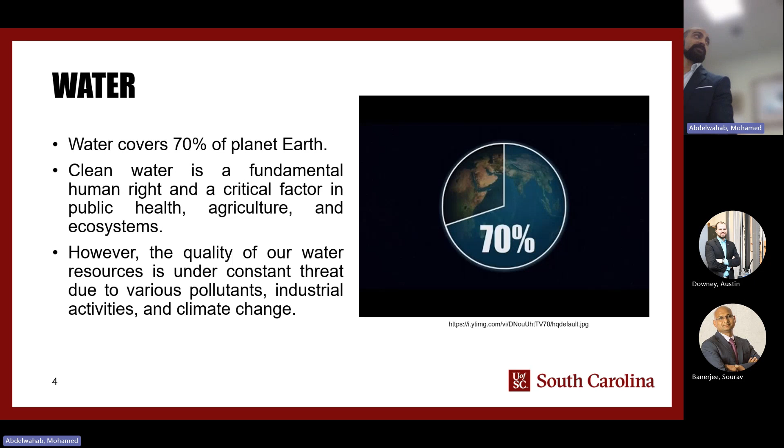Overview. We all know that water covers 70% of planet Earth, and clean water is a fundamental human right and a critical factor in public health, agriculture, and ecosystems. However, the quality of our water resources is under constant threat due to various pollutants, industrial activities, and climate change. That's why it's really important to have continuous water quality monitoring to ensure the safety and sustainability of our water resources.

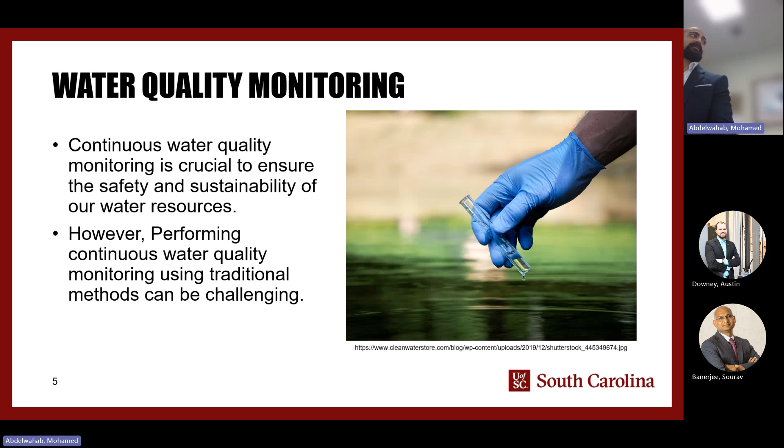However, performing continuous water quality monitoring using the traditional methods can be challenging for many reasons. For example, it's going to be labor intensive, high costs. We're going to have access to limited data, delays in data reporting, spatial variability, and incomplete monitoring. That's why it's important to have an advanced testing method. For example, it should have automated real-time data collection, multi-parameter monitoring, data processing and interpolation, and long deployment duration.

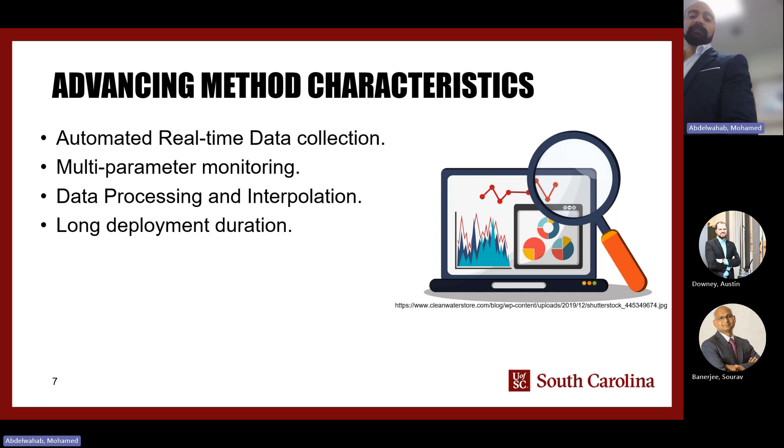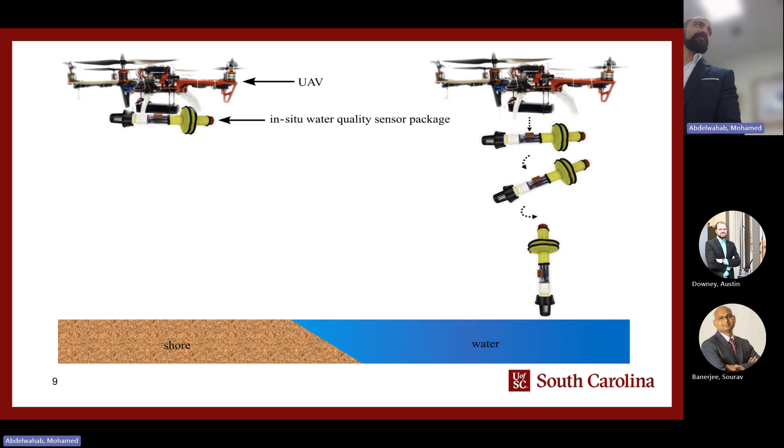The method in our study depends on a UAV designed by ARTS Lab team. This UAV is going to carry our sensor package and deploy it in the desired testing pond or the water body that we want to test. The deployment mechanism is going to be based on an electropermanent magnet, which uses electric current to create a magnetic field. And this current controls the magnetic field and can be toggled on and off.

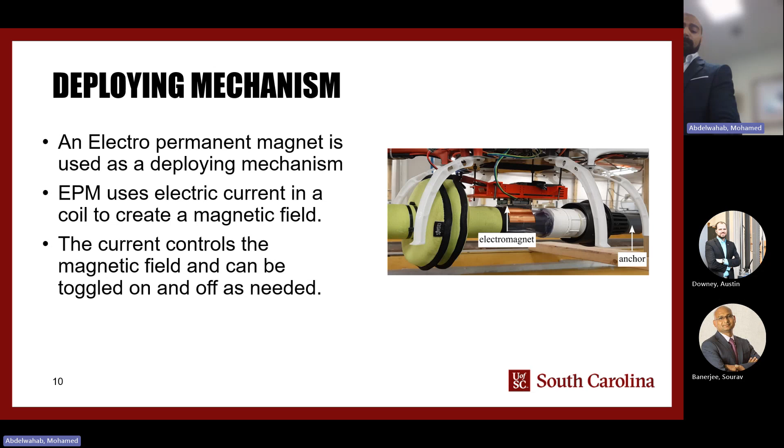After collecting our data from the sensor package, we're going to employ kriging to create a spatial representation of the water parameters on a map. And this will help us to identify the areas of concern and assess the overall water quality.

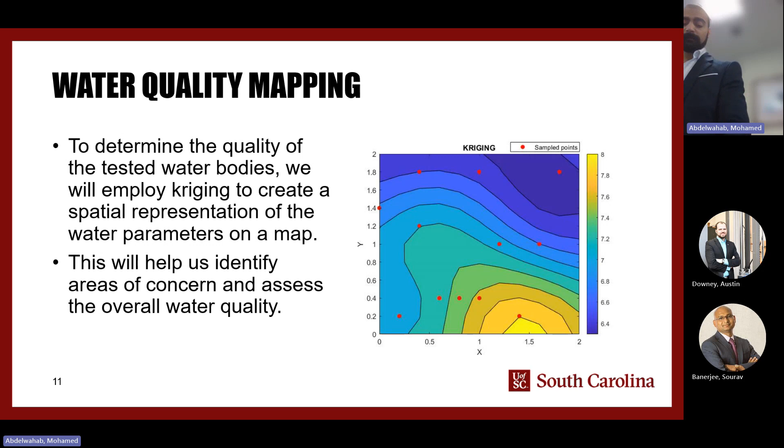Our in-situ water quality sensor package is a real-time multi-parameter monitor. It's capable of storing data on site. It has aerial deployment, it's power efficient, with long-term testing capability, floating capability, and it's fully waterproofed.

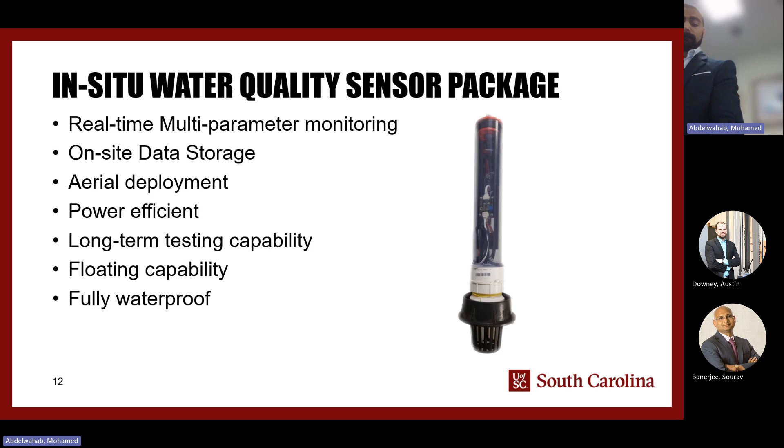Our sensor package consists of two parts, an inner part and an outer part. The inner part consists of a tray, which is holding all the electronic components inside it. And the electronic components consist of a battery, PCB, microcontroller, and sensor modules. The outer part is acting as a housing for the inner part and consists of a sealing cap, buoys, a metal grip, which is the part that is going to be attached to the UAV, and a probe protection cap.

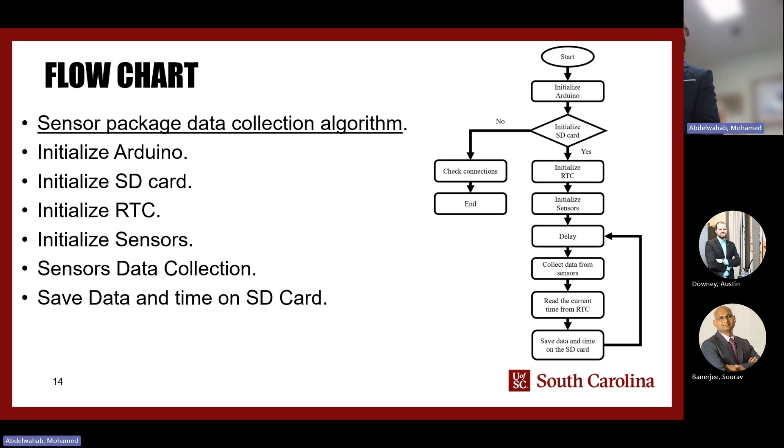The following flow chart is showing the sensor package data collection algorithm. It's going to start by initializing the Arduino, and then it's going to check for the initialization of the SD card. If no, it's going to ask for checking the connections. If yes, it's going to initialize the RTC and then initialize the sensors. After that, there's going to be a delay time, depending on the sampling time that we had adjusted. And then it's going to start collecting the data from the sensors. After that, it's going to read the current time from the RTC, and it's going to save both the data and the time on the SD card.

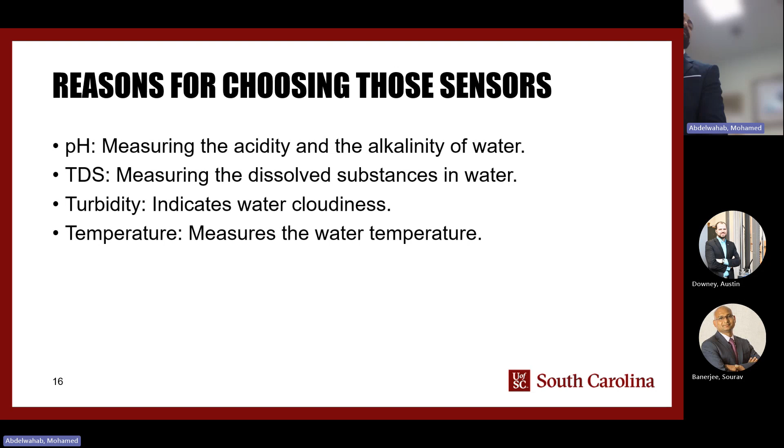Our sensor package consists of 4 main sensors: pH, TDS, which is the total dissolved solids, turbidity, and temperature. The reasons for choosing those sensors: the pH is for measuring the acidity and alkalinity of the water. TDS is measuring the dissolved substances in water, and a high level of minerals inside the water can affect the irrigation process. Turbidity indicates the water cloudiness, and this can be a sign of contamination inside the water. Temperature, of course, is for measuring the temperature of the water, and this is related to the solubility of oxygen inside the water.

System hardware. We got 4 sensor modules in our sensor package: pH sensor, TDS, turbidity, and temperature. All our sensor modules are analog sensors, except the temperature. It's a digital sensor.

All our sensor modules' operating voltage is 5 volts, and the unit range for the pH is from 0 to 14, and the TDS is from 0 to 1000 parts per million. The range for the turbidity sensor is from 0 to 100 nephelometric units. The temperature ranges from -55 to 125 Celsius.

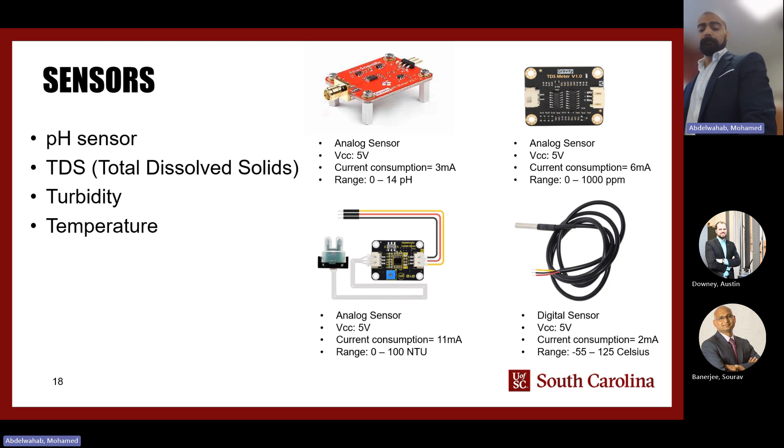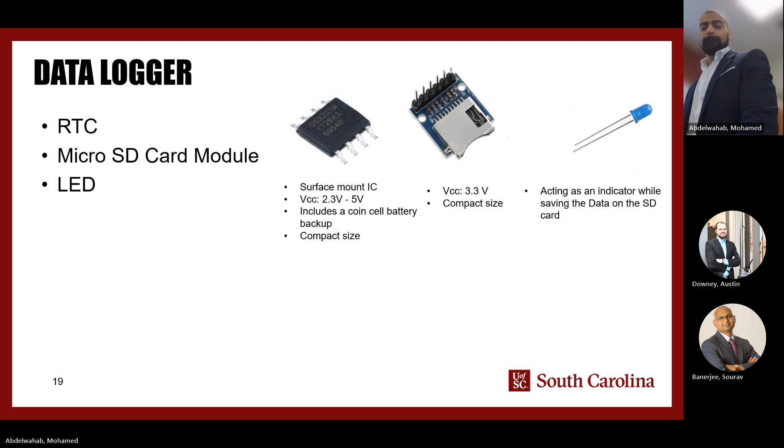The data logger consists of 3 main components: the RTC, the micro SD card, and an LED. The RTC that we have used is a surface mount IC and includes a coin cell battery backup, and it's known for its compact size. And for the SD card, the operating voltage is 3.3 volts, and it's also known for its compact size. The LED is acting as an indicator while saving the data on the SD card. The microcontroller that we use in our sensor package is an Arduino Nano. It's known for its compact size and low cost.

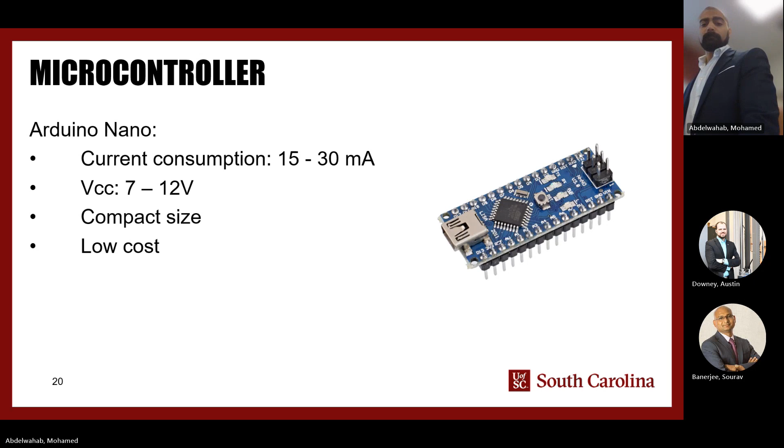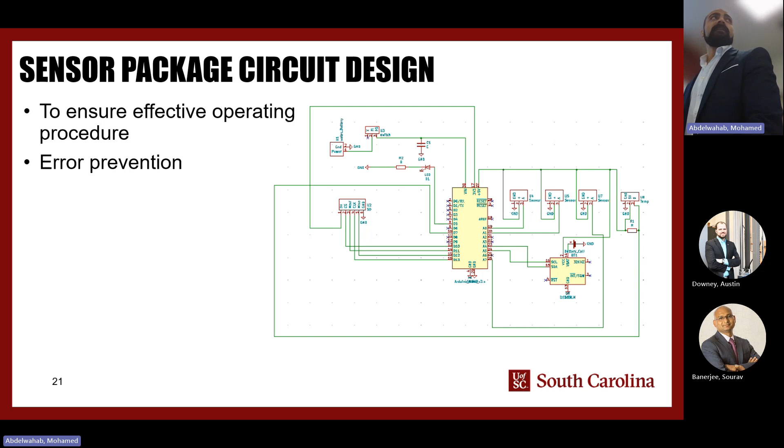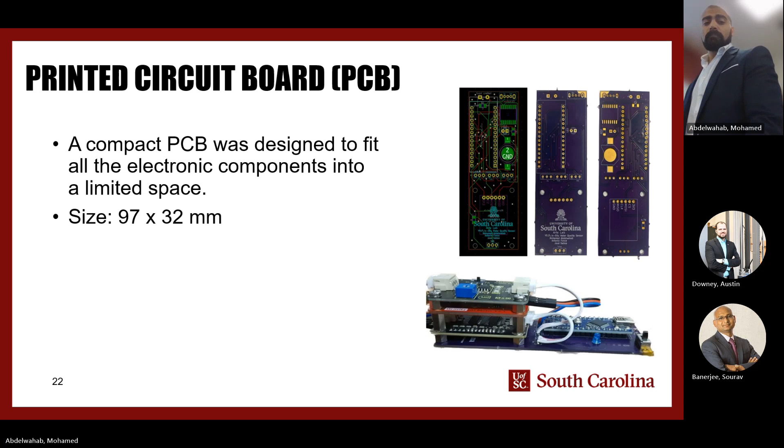Then we started designing a schematic which includes all the electronic components for our sensor package to ensure an effective operating procedure and for error prevention. After designing the schematic, we started designing a compact PCB, which is going to include all the electronic components because we have limited space. And as you can see, the size of the PCB was very small. It's 97 millimeters in length and 32 millimeters in width. The powering source of our sensor package is a rechargeable LiPo battery, 7.4 volts and 1000 milliamp hours.

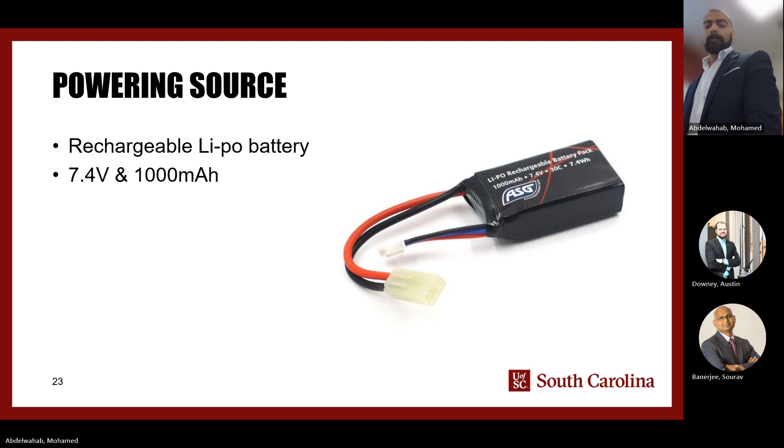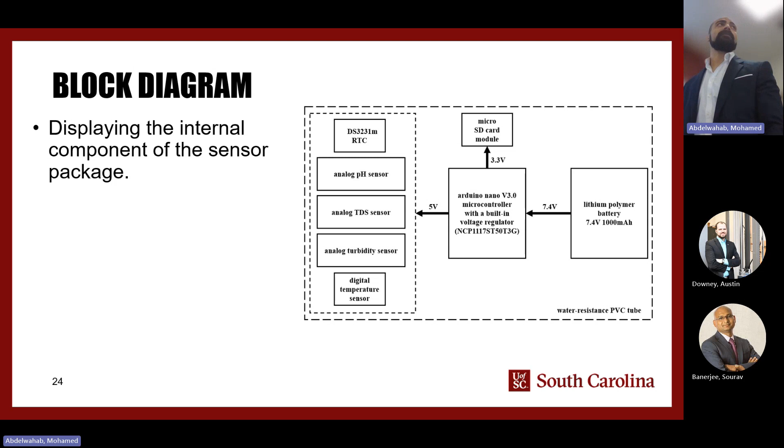The current block diagram is displaying the internal components of our sensor package. As you can see here, the LiPo battery is powering our microcontroller, and the microcontroller is powering the SD card and the RTC and the 4 sensor modules that we got.

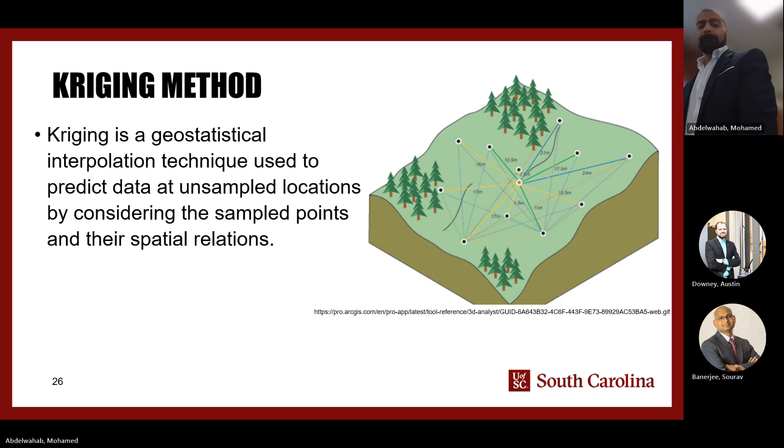Kriging. Kriging is a geostatistical interpolation technique used to predict data at the unsampled location by considering the sample points and their spatial relations. Kriging depends on a semivariogram, and the semivariogram is a spatial relation map that illustrates how data points become more similar or different as their distance from each other changes.

And it consists of 3 hyperparameters: the nugget, the range, and the sill. The nugget represents the variation of the data at very small distance. The range is the distance in which the data points are correlated, and beyond this range, the data points become uncorrelated. The sill is the total amount of variation in the data set.

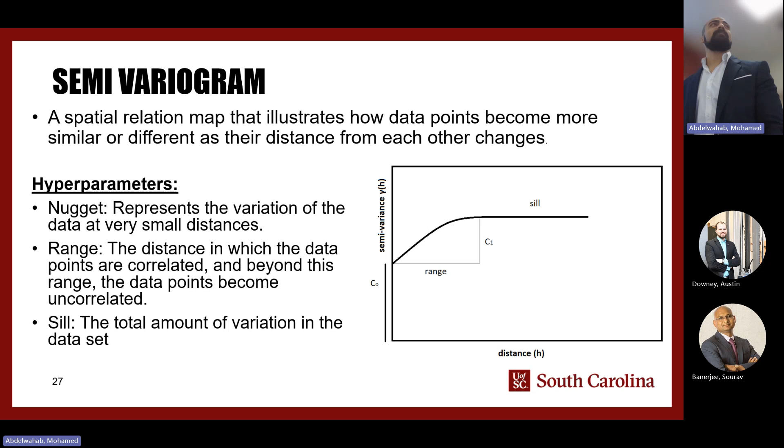Once we finish our 2 matrices, we get the semivariogram equations. It's going to depend on the distance. So if your distance is 0, for example, like H11, we're going to use the first equation, which is going to be 0. If the distance is between 0 and lower than or equal to your range, we're going to use the second equation. The third equation is going to be used if your distance is more than the range. And C is representing the sill, C naught is the nugget, and A is going to be the range.

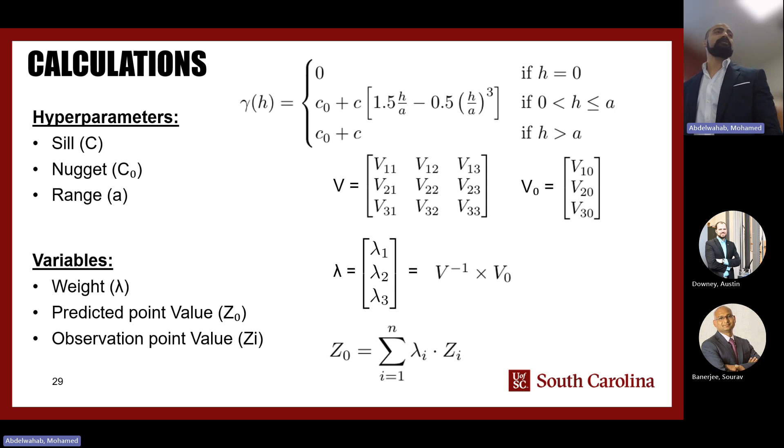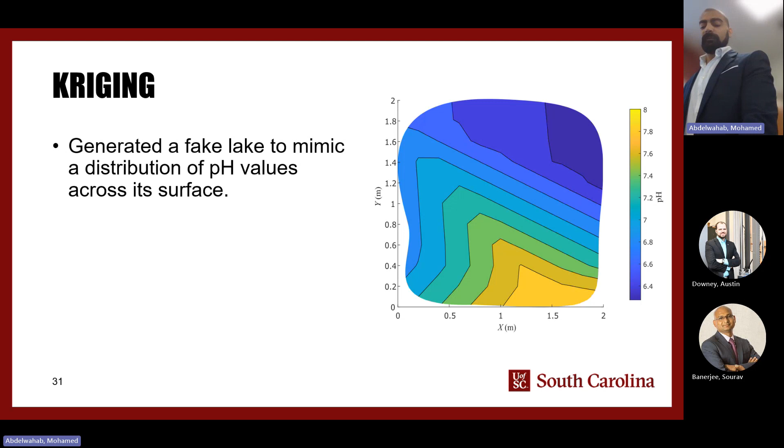Validation. To ensure the validation of our kriging method, we generated a fake lake by using MATLAB, and this fake lake is simulating a distribution of pH values across its surface. After that, we start taking random points, and we employ kriging to see how accurate our prediction is. And as you can see, first we start with 4 sample points, and then we increase it to 6, 8, and 10. After that, we increase it to 15, 20, 25, and 30.

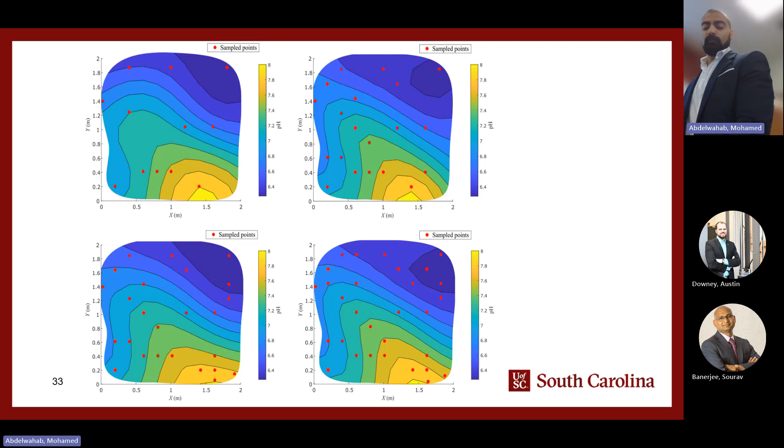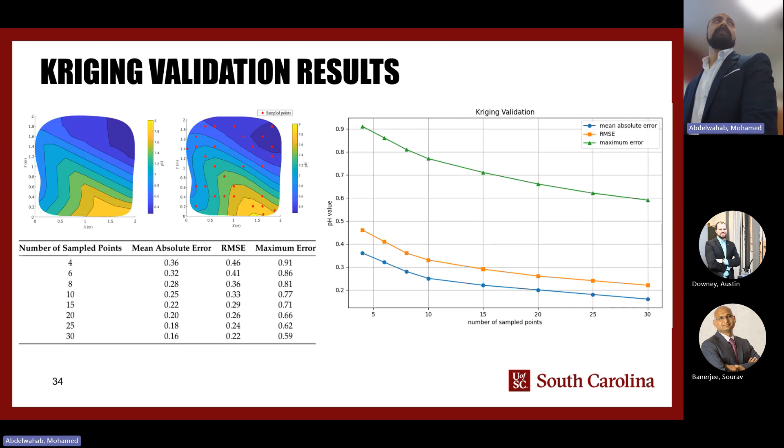And as you can see, once we increase the sample points, our prediction became more accurate. And as you can see here from the plot, the error and the number of sample points are inversely proportional. So once we increased our sample points, we start having less error and more accurate prediction.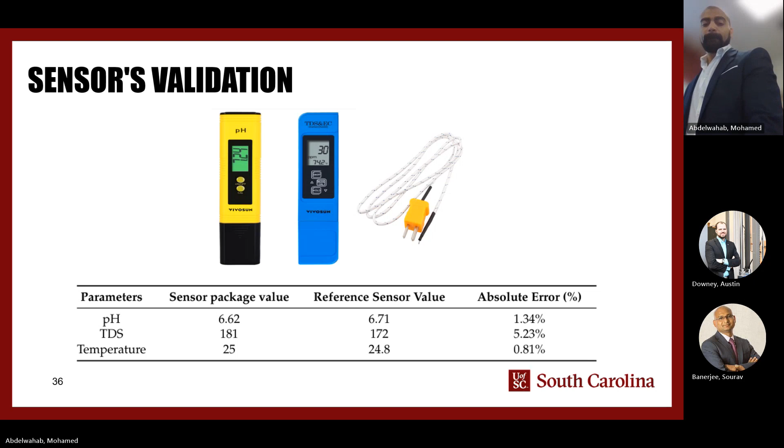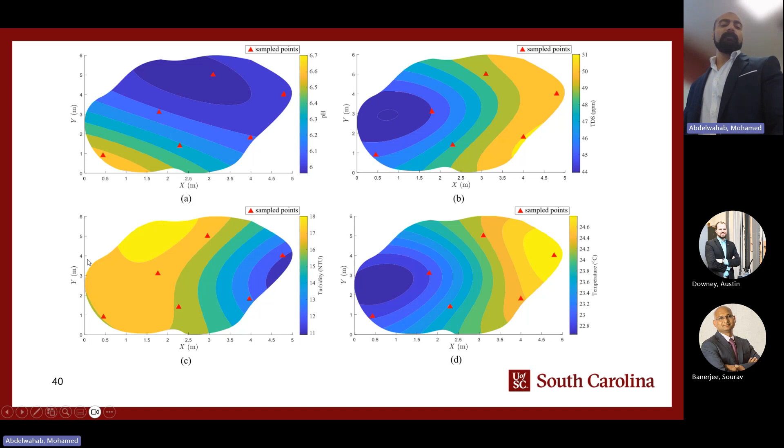The results: we deployed our sensor package in a stationary pond on campus, in 6 different locations. And then after collecting our data, we employed kriging. So as you can see here, we found out that the bottom left corner has higher pH values, and this is because of the presence of algae. And while testing the pond here, there was a concentration of sunlight, so we got a higher temperature, and this caused the higher TDS values. The left-hand side of the pond showed high turbidity values.

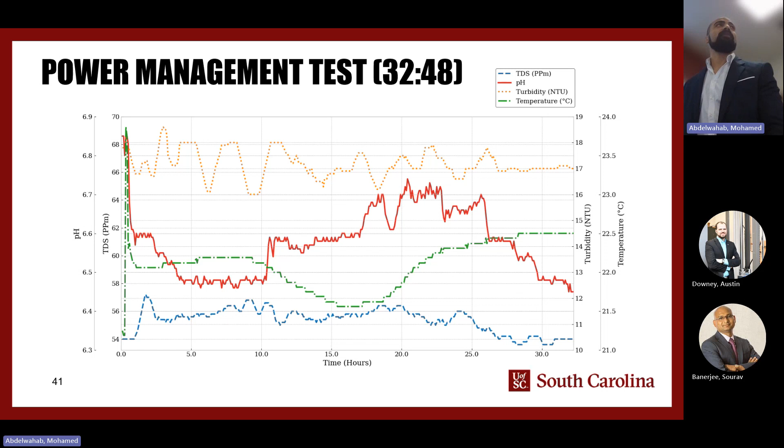Another test was conducted. It was a power management test to see how long our sensor package is going to last. It lasts for 32 hours and 48 minutes.

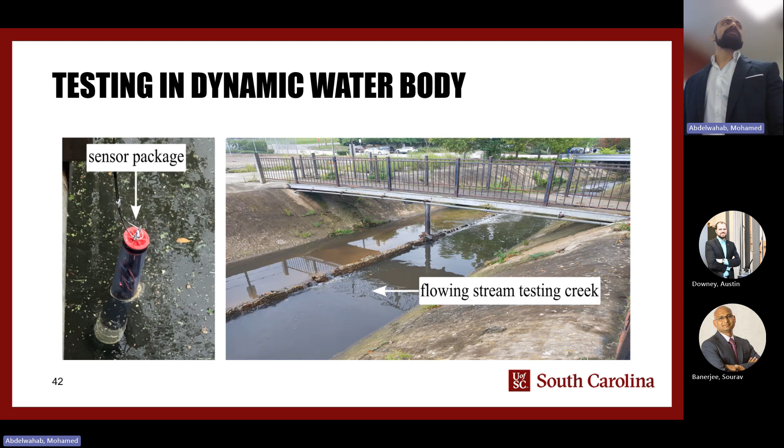The last test we conducted, we wanted to test the capability of our sensor package to be deployed in a dynamic environment. So we deployed our sensor package in the creek behind 300 Main, and we tied the sensor package with a steel rope to the bridge. And these are the results that we found from the test.

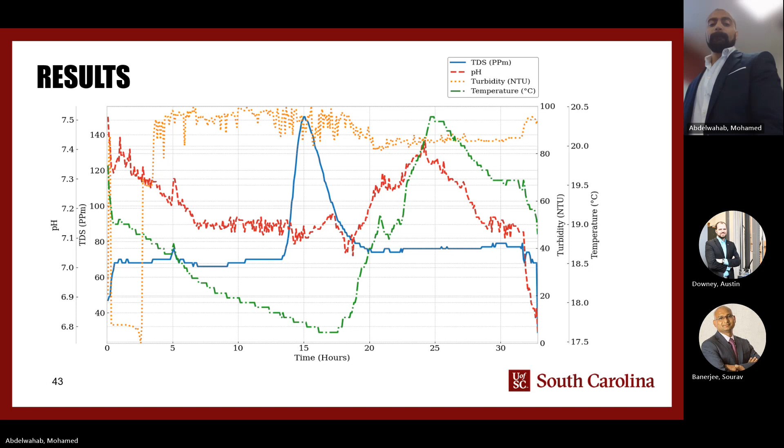And currently we're working on a journal paper, which is going to be submitted to MDPI Sensors, and the estimated submission time is going to be December 2023.